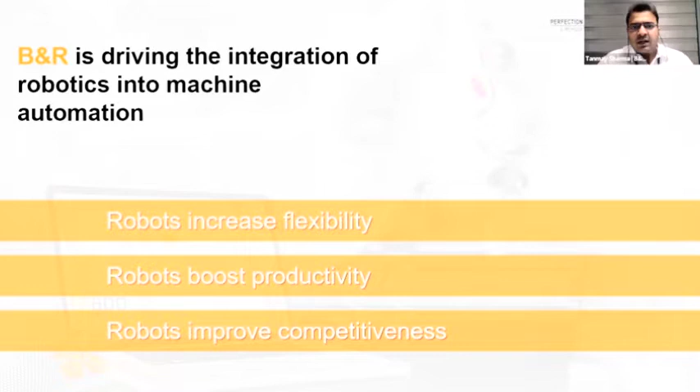So when we talk about these problems, what solutions do we have in the market today, and how can we address all these problems one by one? We are going to discuss this in a couple of further slides.

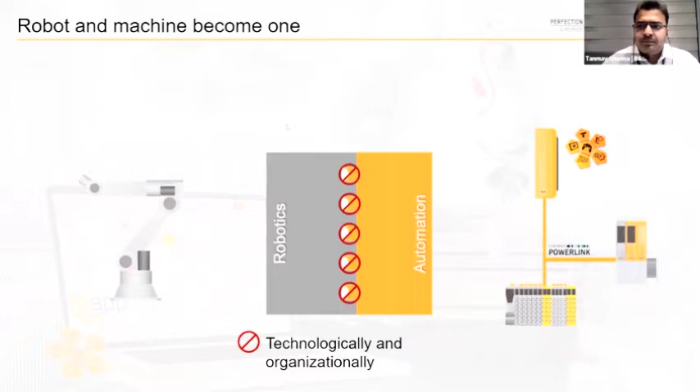As I already mentioned, combining these two ecosystems, the robotics part and the machine automation part, is not very easy as of today. With the concept of machine-centric robotics—again I'll explain this term in a little bit more detail in the coming slide.

So with MCR, that is machine centric robotics, what we are trying to do is combine these two ecosystems to make one solution. Let's take that in depth now. Machine-centric robotics is a large step towards mastering the challenge of modern machinery. This approach sees the robot and machine become one, and the robot becomes an integral component of the machine.

It dramatically reduces the complexity of the system, because now I have only one system with MCR. I only need to care about one system, and the robotic controller goes out of the picture. Now the robot directly communicates with the PLC, and it is integrated, becoming a peripheral of the PLC instead of being in a different ecosystem.

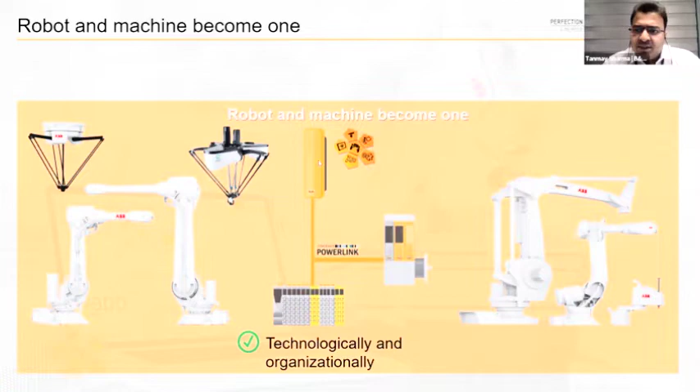So with this MCR solution, the advantage we get is that we bring the robotic manipulator together with machine automation, and try to integrate and control both machine and robot with one controller, that is the PLC.

This also allows us to have high synchronization of all movements - synchronization between the machine, let's say a conveyor belt, and the robot increases, because we are reducing the communication delays which existed earlier.

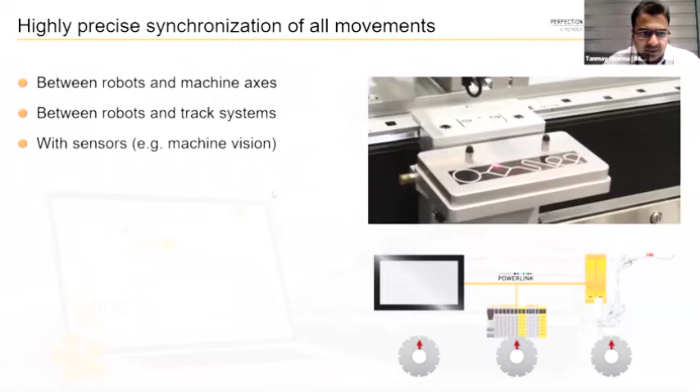This will also increase efficiency in terms of communicating with the track system, sensors, and machine vision, which can also be integrated with the same system, because track technology, machine vision - all these entities can be collaborated very easily with the PLC. So with integration of the robot, this becomes more efficient and more productive.

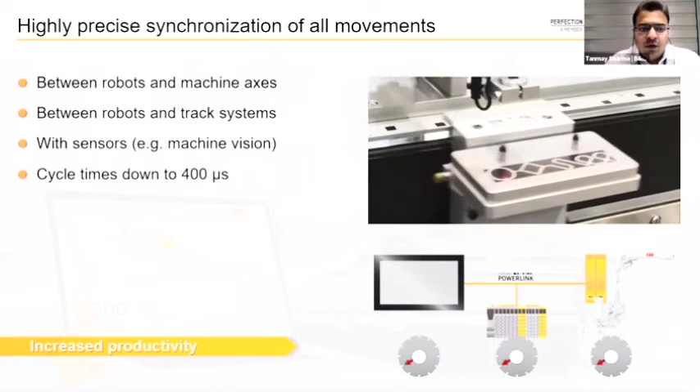Now let's talk in terms of software. Earlier, when we used to have two different ecosystems of robot and machine, we needed know-how of two different platforms. But now, with controlling machine and robot with a single controller, we need know-how of a single platform, and that can be the PLC programming software, that is Automation Studio.

So with the same software, we can also program the robot. In addition, without having specific knowledge of robotic programming language, I can still run a robot in a very efficient manner. We know that in industry approximately 70% of people are trained on PLC, whereas 30% have knowledge of robotic programming and controlling.

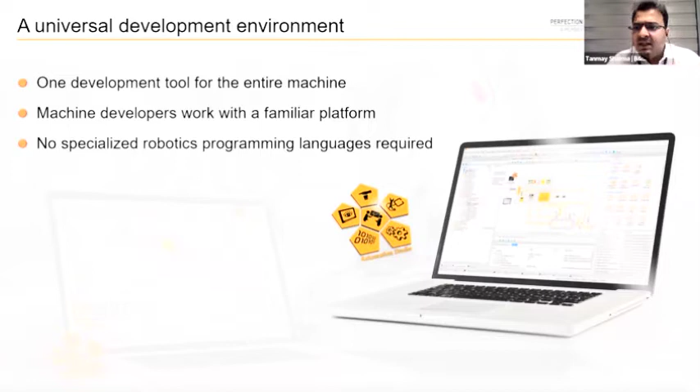So it is easier to get engineers who can control a PLC rather than a robot. This gives us even more flexibility in this particular domain. And obviously it will make our diagnostics easier in the future, because there is only one platform, and so on and so forth.

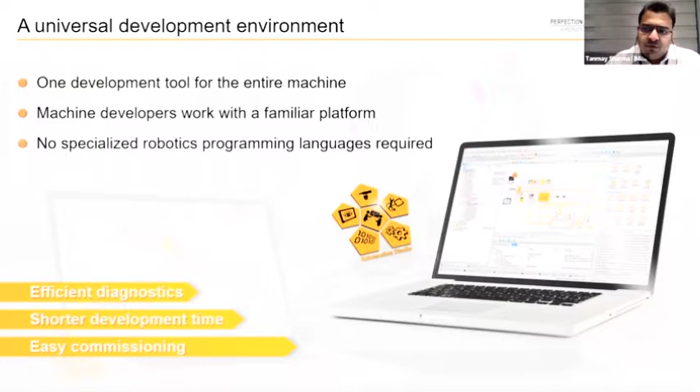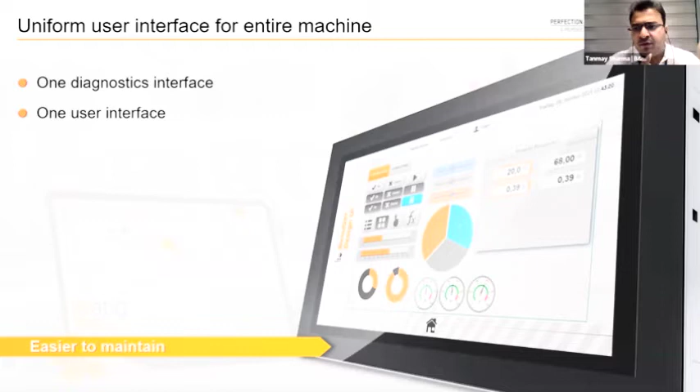Also, the interface of the machine - earlier, for example, we used to have a different panel to control the robot, and a different panel to control the machine. Now we are not only reducing the number of controllers, but we are also giving an option to control both entities with a single controller.

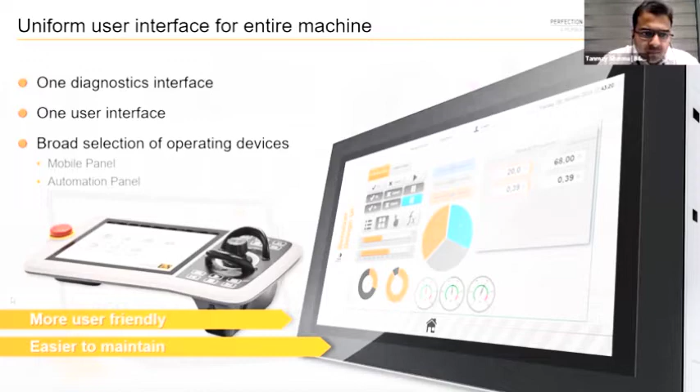So let's say if I have a robotic or mobile panel for my robot, I can control only the robot with that mobile panel. But now I can control the robot as well as the machine from the mobile panel, and I can also control the robot and machine both with the automation panel, which earlier used to only control the machine. So this is another advantage of having MCR.

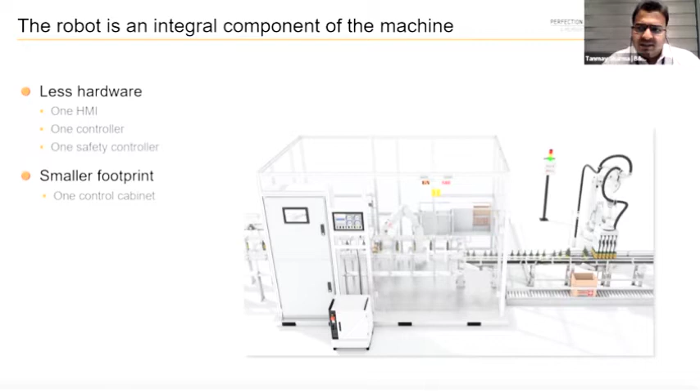Also, it decreases the footprint in the machine. When we are talking about removing the control cabinet, removing the robotic control cabinet from the system itself, it's obviously going to reduce the footprint. I'll just show you a small animation in order to see how it can be done very efficiently.

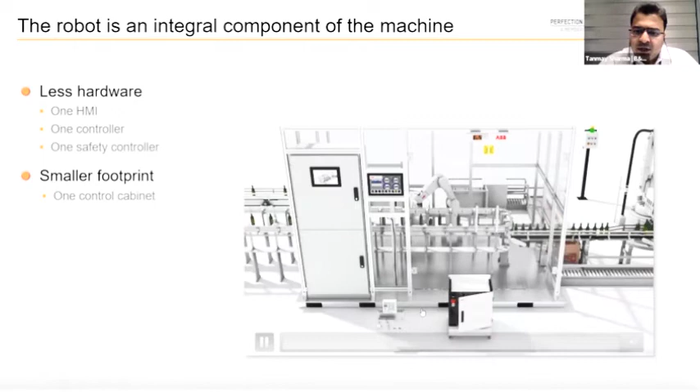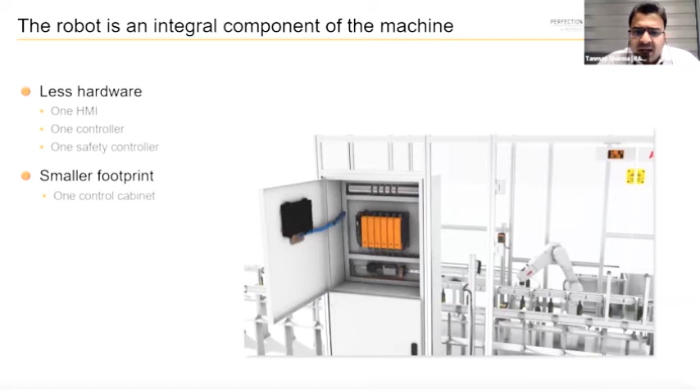So at the bottom, you can see there is a robotic controller panel. We are removing that and putting the same components into the machine control cabinet, so here itself we are able to control the robot with the PLC, which reduces the footprint and makes the system more cost efficient.

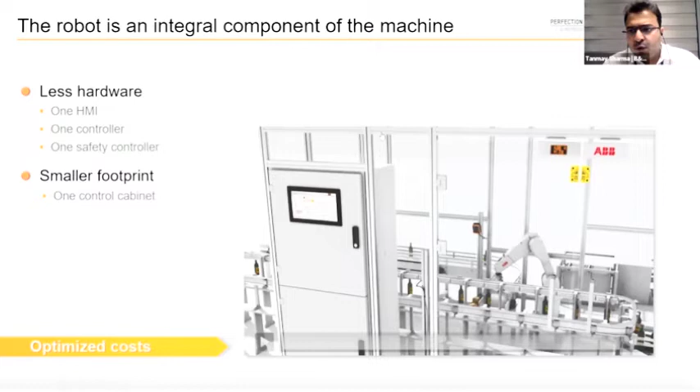In this layout, let me use a pointer. Here we have a control cabinet and here a robot cabinet, and these two do handshaking with each other to control the system. Here I have a conveyor, and robots are working on that conveyor, and this handshaking creates a delay. In the earlier system, it used to create a delay.

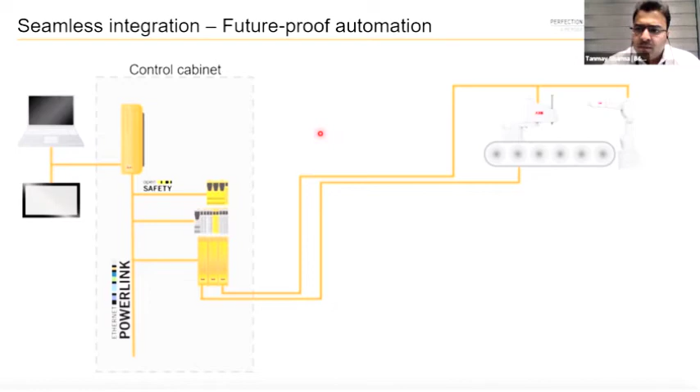So now we have the same machine architecture with us, but instead of having a separate robotic controller, we are directly integrating the robots with the PLCs itself, that is with the controller of the machine itself, in order to reduce or nullify the delay in communication.

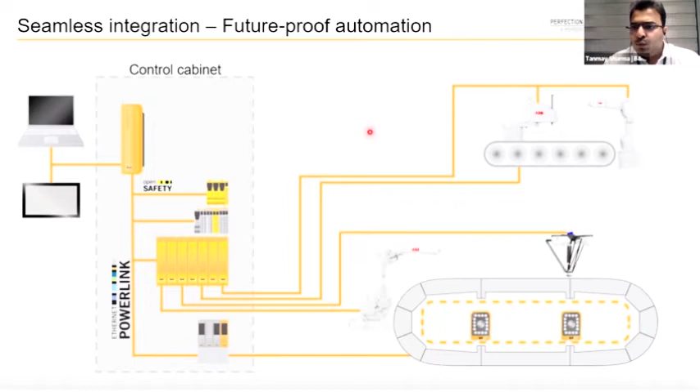Not only does this integration help us achieve all the advantages we talked about, but this architecture can be further expanded to different levels. If I want to integrate a track solution, or go further and integrate more robots, more Delta, SCARA and articulated arms, and involve more vision systems, these flexibilities will be provided because now I am working on one simple platform.

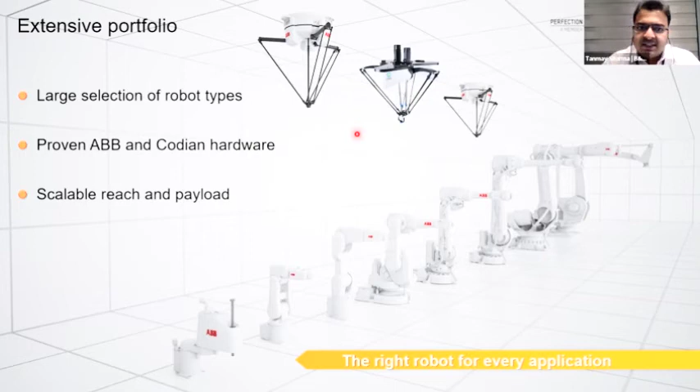So this was more about the introduction. B&R right now can accommodate all ABB and Codian robots. In 2017 we became part of ABB, and now we can successfully integrate all ABB and Codian robots in our system and create a very successful and efficient MCR system for our customers as of today, and we are working on future models as well.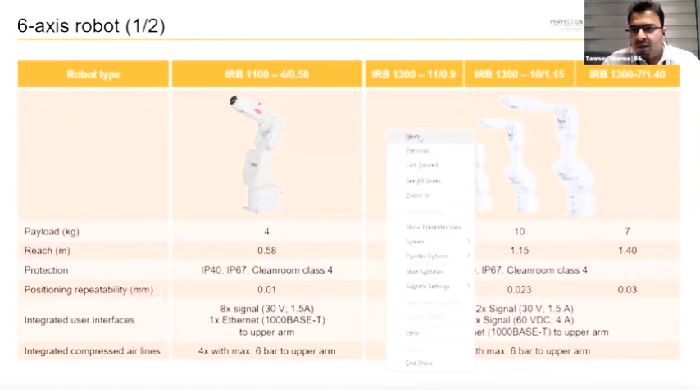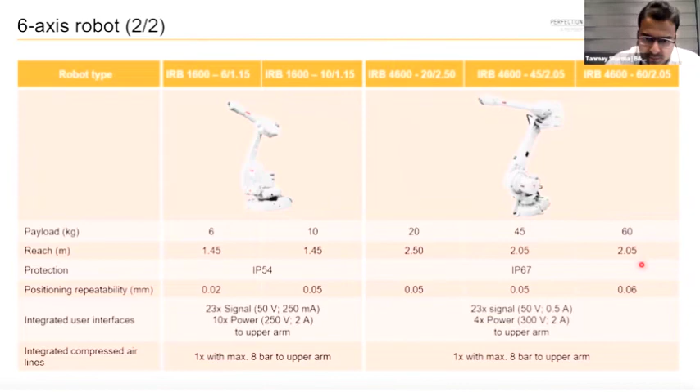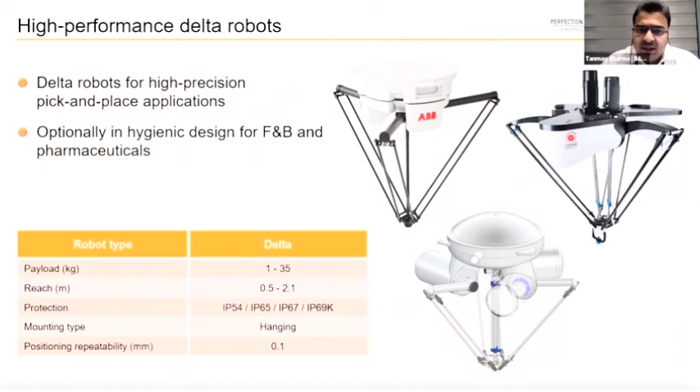Talking about the portfolio offered by us, we start from a very simple Delta and SCARA robot, with 4 kg of payload and 0.58 meter of reach, and it goes up to 45, maybe more than that, 60 kgs of payload, and even further reach of 2.05 meters. This product portfolio also covers the Delta robot with different IP protection: IP54, IP65, IP67 and IP69, which can be very easily used in food and beverage and pharmaceutical industries. All of these can be very successfully integrated with the PLC system or integrated automation system itself.

Okay, talking about the software part, I think we are running a little short on time, so very quickly let me cover the software part.

When we are trying to remove the robotic controller itself from the solution, and asking engineers to work on the same PLC software platform to control a robot, we need to have some tools in order to make the life easy. So yeah, we need to make life a little easy.

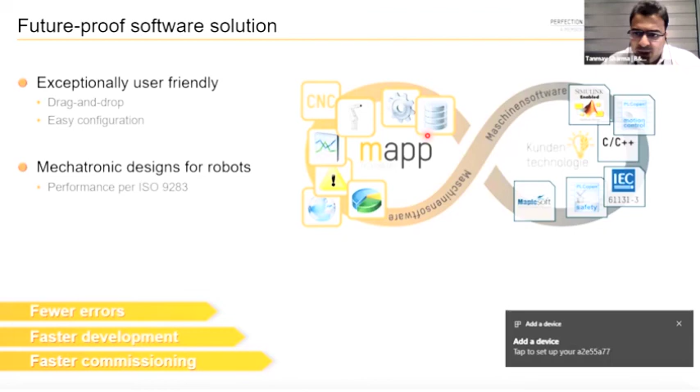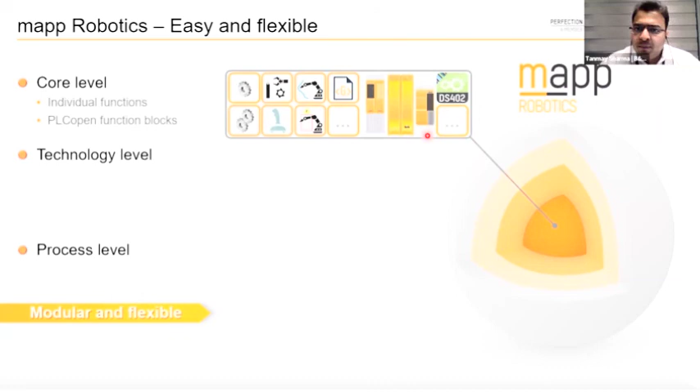In order to do that, we have a mapp technology which is already running in our PLC, and this mapp technology provides the option for an engineer to use already developed function blocks in our libraries to control any component, and in this case our component is the robot. So with mapp Robotics, at the core level we already have all G-code and different programming languages included within the software solution, and any engineer can very easily use these function blocks.

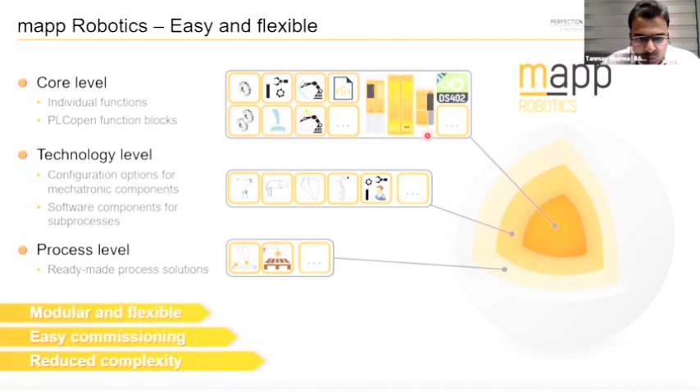Then at the technology level, let it be Delta, SCARA or articulated, we can easily control it. And at the process level, let it be packaging, palletizing, sorting or distribution, the solution is available in mapp Robotics. So with this, what we are trying to achieve is making the robotic and machine interaction more easy, and trying to bring everything onto the same platform.

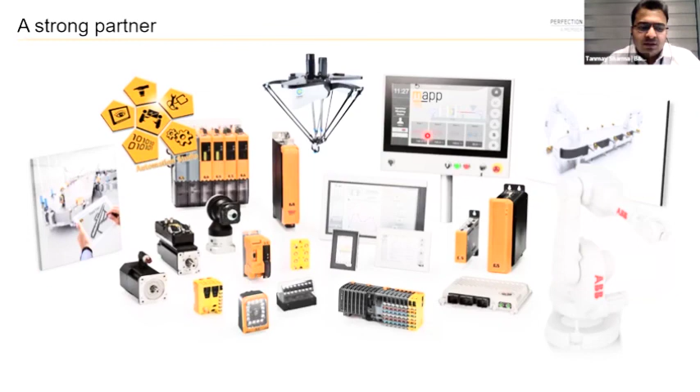So all the people working in the industry, let it be end users, OEMs, or engineers, everyone starts facing fewer problems and comes up with a better solution in terms of product. So thank you.